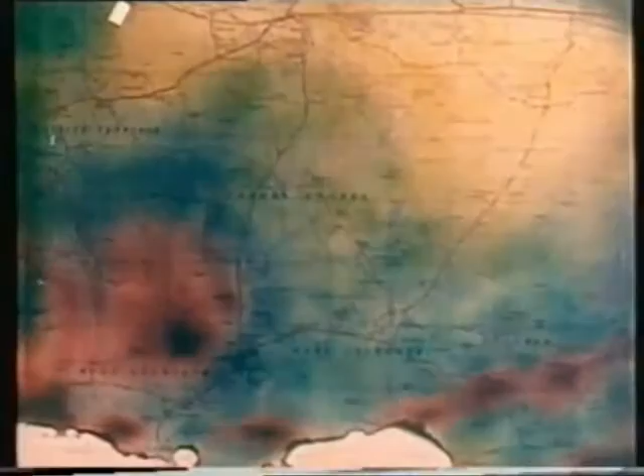At the Atomic Energy Authority's research establishment at Winfrith Heath, the various processes will produce active and non-active effluents. It was planned that the slightly radioactive effluent should be discharged 2 miles out to sea. This involved the laying of a pipeline 6 miles overland from the site to the coast, and then out 2 nautical miles.

The contours of the land through which the pipeline was to be laid varied considerably. At the 6 lowest points washouts had to be installed, while at the higher points, air valves were fitted. At the highest point in the line, 275 feet above sea level, were break pressure tanks.

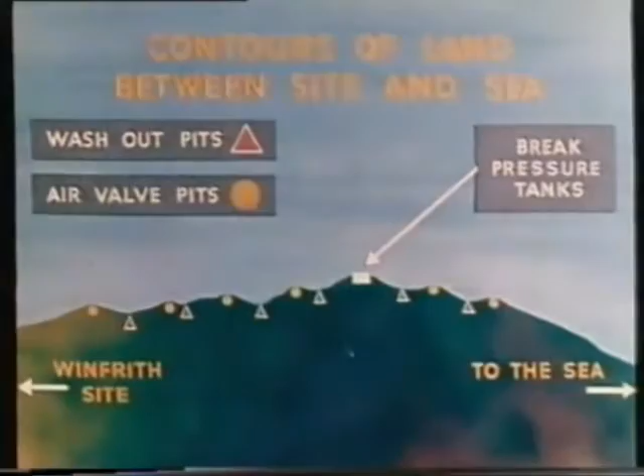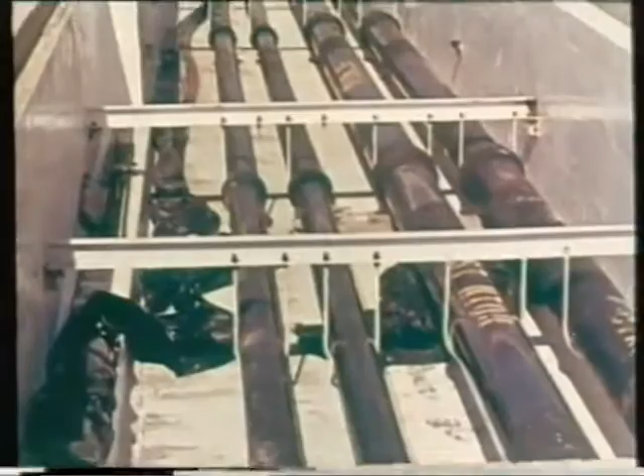At Winfrith, the active effluents will be pumped from the various buildings to delay tanks through pipes laid in ducts coated with chlorinated rubber paint to facilitate decontamination in case of active leakage. Effluent from the delay tanks will be sampled before being pumped to disposal tanks next to the master pump house. Non-active effluents will be pumped direct to the disposal tanks.

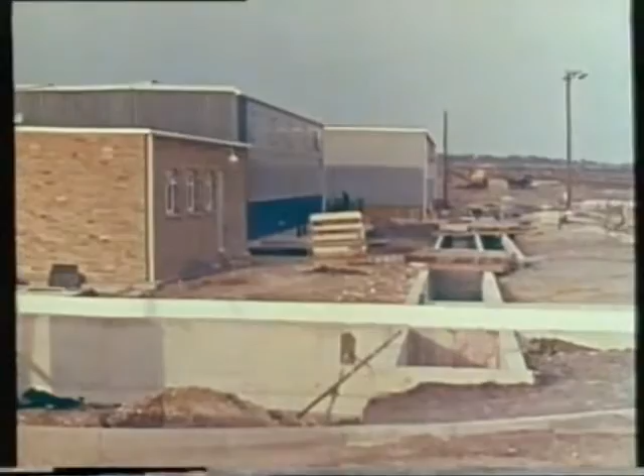From the master pump house, the overland pipeline was designed as a pipe resting within a pipe, the active effluent being discharged through the inner pipe and the non-active effluent through the surrounding space. The idea of a pipe within a pipe is a double precaution against any possibility of the leakage of radioactivity into the underlying strata of water-bearing chalk.

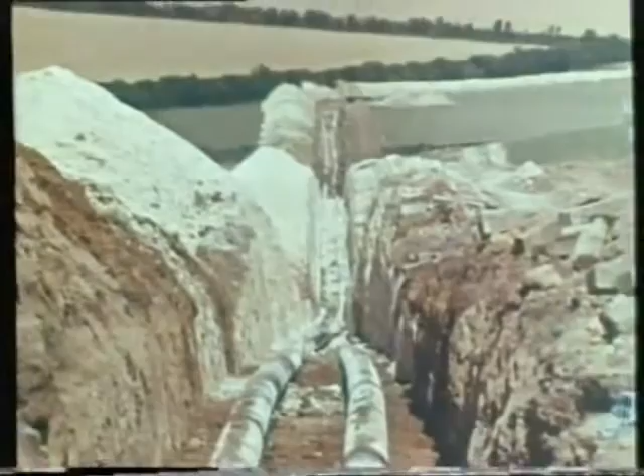The route of the pipeline was planned primarily to give ease of access to the washout and air valve pits at all times for maintenance. For instance, should washing out the pipes become necessary and there is any possibility of the liquid being active, it would be pumped direct into mobile tankers. Any spillage from the air valves or washouts will be contained in the pits and removed in the same manner. The route was also planned to avoid undue disturbance to agriculture and the surrounding farmland.

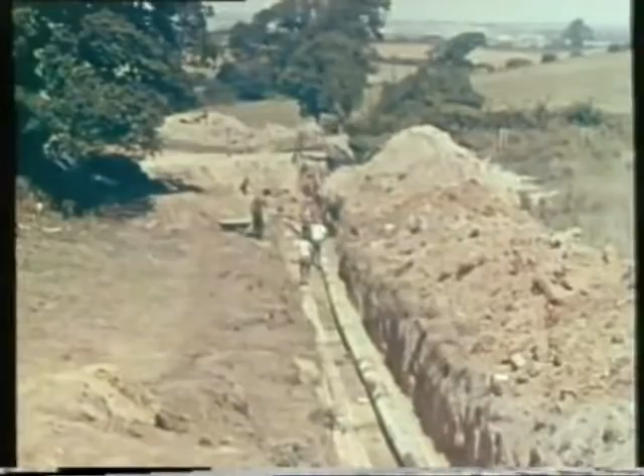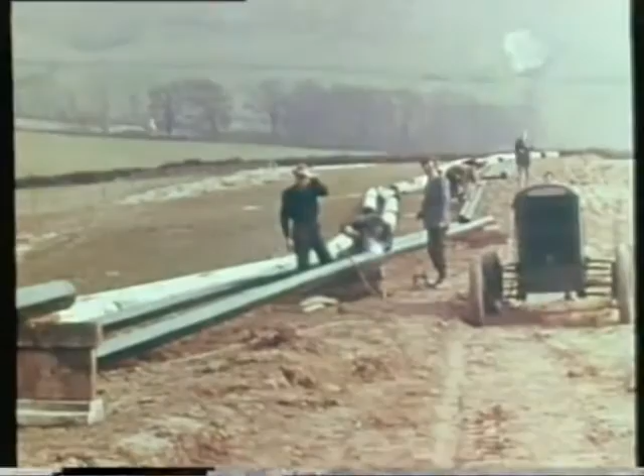The pipeline should be considered in 2 stages: overland to the coast at Arish Mell, then the next stage of 2 miles out to sea. It was no ordinary pipe-laying job, and a number of tricky engineering problems were involved. In many ways, the project was unique. The overland line consists generally of a 6-inch pipe inside a 12-inch pipe. The pipes are mild steel tube, 3/8 of an inch thick, coated with bitumen inside and out.

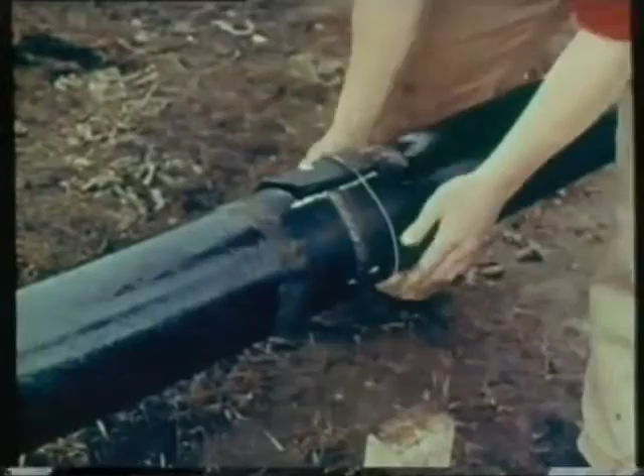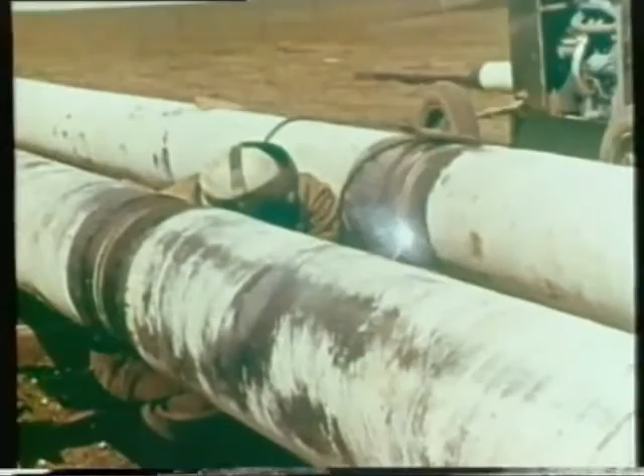3 40-foot lengths of inner tube were first butt welded together, and the welds radiographed by gamma rays. When found satisfactory, the scale was removed from the inner weld by a rotating flailing head, and the interior coating of bitumen made good at the weld. The same procedure of assembly was followed with the outer pipes. 3 lengths were welded together, and the external protection of bitumen asbestos sheathing, reinforced with woven glass fiber, was made good at the welded joint. This method of pipeline construction was carried out over the 6 miles of land line.

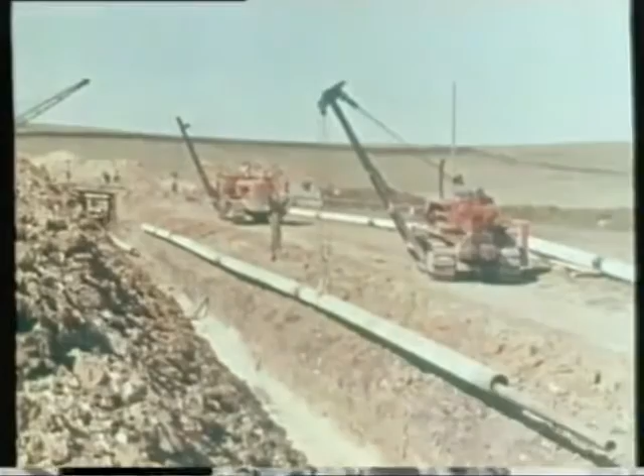To prevent damage to the internal coating of the outer pipe, a carriage was fitted to take the weight of the inner pipe as it was inserted. The length of pipe within a pipe was then lowered into the trench and offered up to the leading end of the pipeline already laid. The inner pipe was lined up, butt welded, the weld descaled and radiographed.

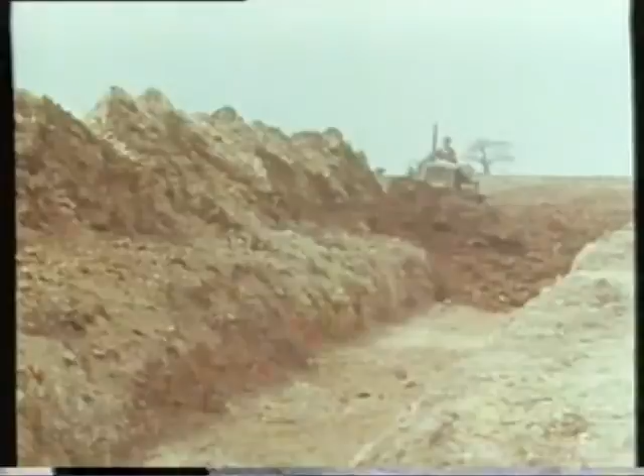When the radiograph showed that there were no defects in the weld, the same drill took place with the outer pipe. As a check on the standard of welding, about 5% of the welds on the outer pipe were also radiographed. The external shielding was tested and any defects repaired before backfilling. Wherever possible, as soon as the section was completed, the trench was filled in and the land restored. Some points, however, had to be left open for the construction of air valves and washout pits. The depth of trench was such as to provide a 3-foot minimum cover over the pipes.

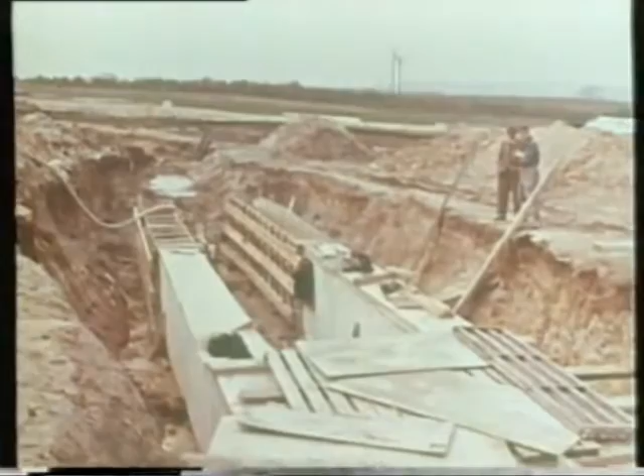Road crossings were necessary at 6 points, but only one of them was under a main road. Here the pipes ran through a concrete culvert protected by a reinforced concrete slab. The culvert has an access and inspection chamber at the end and is long enough to allow for the proposed widening of the road at a later date. Under minor roads and farm tracks, the pipelines are also protected by reinforced slabs of sufficient length to allow for future road widening.

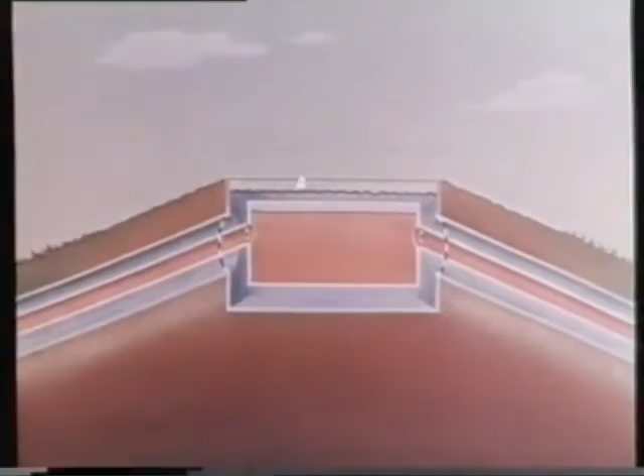At the highest point in the line are the break pressure tanks. Up to this point, the effluent is under pressure from the main pump house. From here onwards, the flow is by gravity. Each of the break pressure tanks consists of a steel tank into which the inner pipe is welded and surrounded by the concrete tank of the outer pipe. Thus, the principle of a pipe within a pipe is maintained.

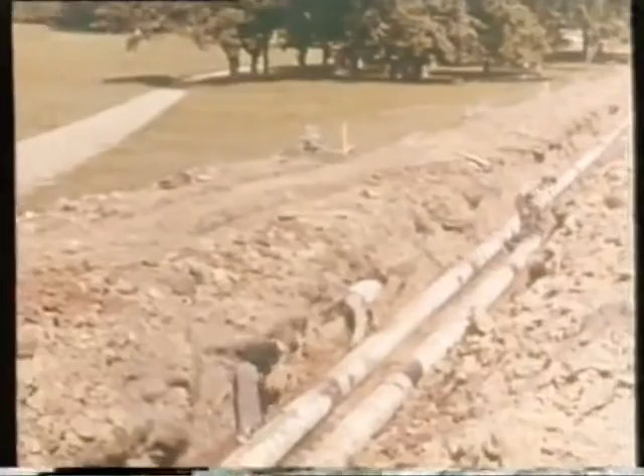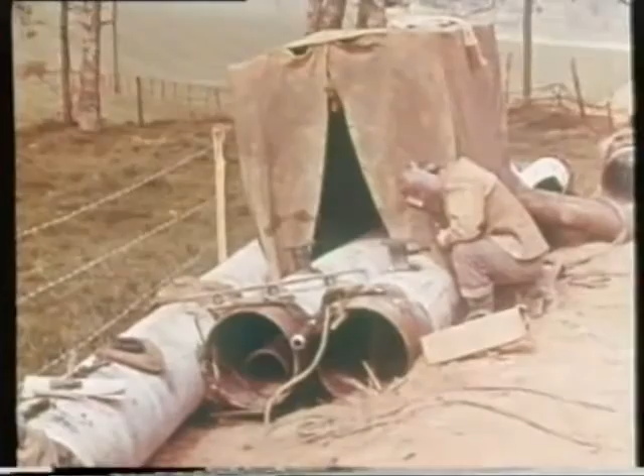About 1.5 miles from the coast, the pipeline runs through the grounds of Lulworth Castle, built in 1588, the year of the Armada. After leaving the castle grounds, the pipeline makes its final under-road crossing. Beyond this, excavations were being made for the last air valve pit of the line. As with the other air valves and washouts along the line, the branches were welded into the inner and outer pipes.

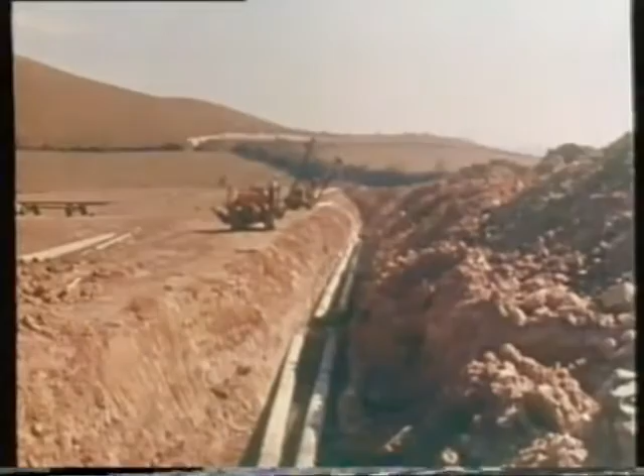From here, the line ran through the War Department's gunnery range, and the depth of trench was increased to provide a minimum of 8 feet of cover as protection against ricochets and the passage of tracked vehicles. On the flatter sections of the gravity side, larger diameter tubes had to be used, but from this point, the rest of the overland run sloped steeply downhill, so the diameters were reduced back to 6 and 12 inches respectively.

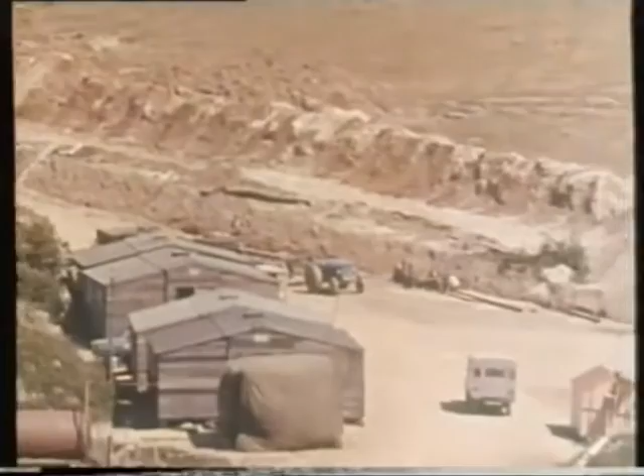For 200 yards through the ranges, the pipes were encased in 2 feet of concrete with 10 feet of earth cover, as this section was in a direct line of fire. Alongside are the cable ducts for the supply of electricity to the shore valve house and for the cathodic protection system of the sea line and the shore end of the land line. And so, the 6-mile overland pipeline continued towards the shore at Arish Mell.

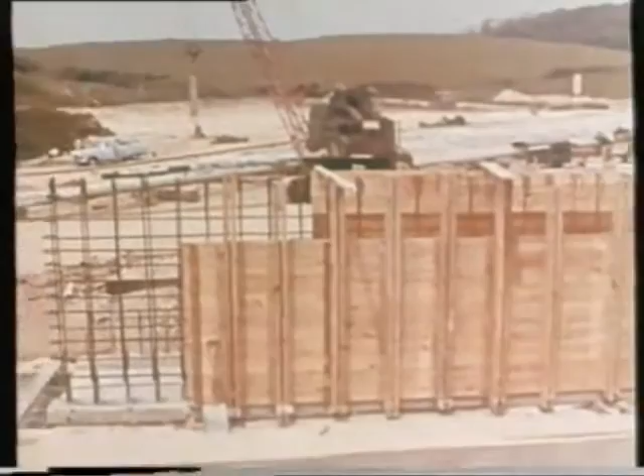Just above the high water mark, the shore valve house was being constructed. In this reinforced concrete chamber, the twin pipe-within-a-pipe landline was to be divided into 4 separate 6-inch pipes. 2 of these, carrying the non-active effluent, were to end 50 feet beyond low water mark. The other 2, carrying the active effluent, were to be connected to the sea pipeline.

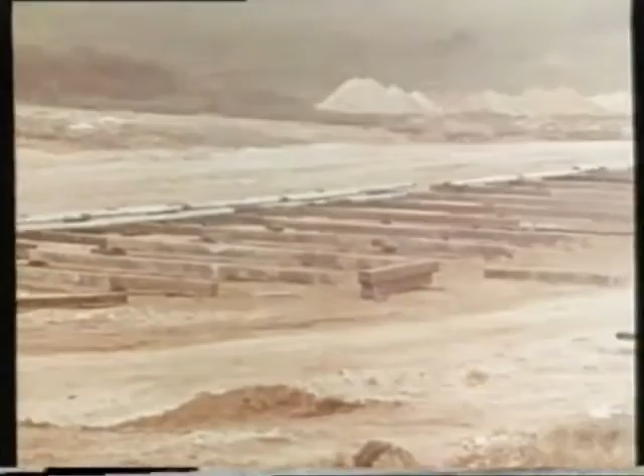This was to be a twin line, 2 miles in length, and provision had to be made for an assembly and launching area. This meant the clearing and leveling of several acres of land running back from the shore. For the sea line, lengths of pipe 6 inches in diameter and ½ an inch thick were assembled on the storage racks, and then welded into 1,200-foot strings.

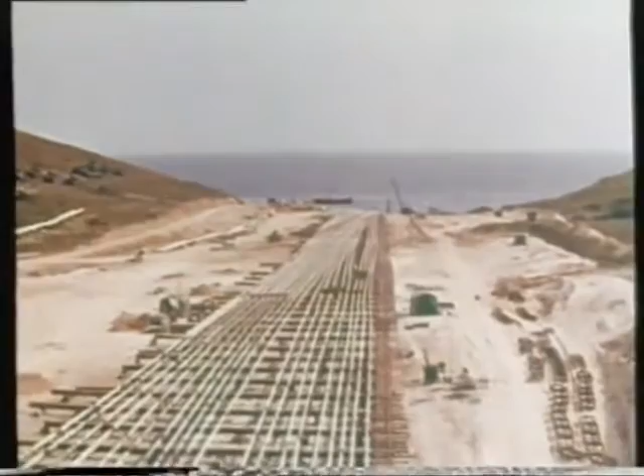Every weld was radiographed, descaled and bitumen coated, as in the case of the landline. The completed strings of pipe were checked for internal obstructions and air pressure tested to 100 pounds per square inch. The external bitumen asbestos coating was of course continued across the joints.

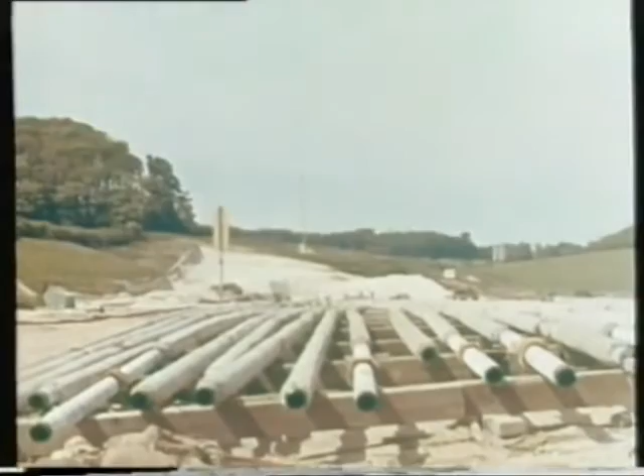Before launching, the pipes were covered with a casing of concrete 1.5 inches thick as a protection during and after pulling and as an anchor for the line. The pipe was surrounded by wire reinforcement held away from the tube by small spacing blocks. Metal shuttering was then placed around the tube and the concrete poured. Vibrators applied to the shuttering ensured that the concrete was well compacted.

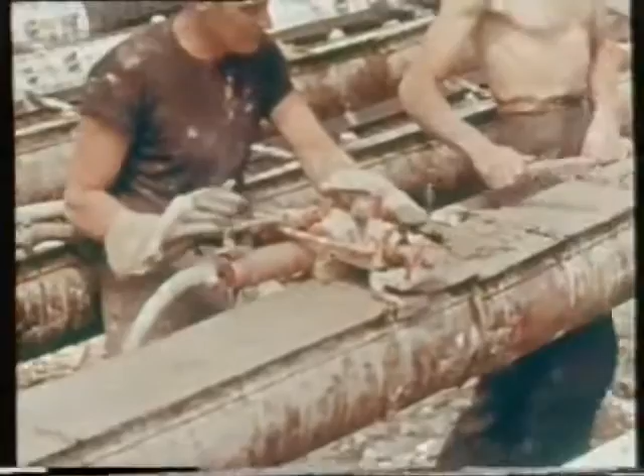The thickness of concrete round the 600 foot of pipeline at the shore end was increased to 3 inches as an added protection and anchorage against wave action where the water is shallowest. The laying of the sea pipeline from Arish Mell to a point 2 miles out to sea involved a great deal of underwater work.

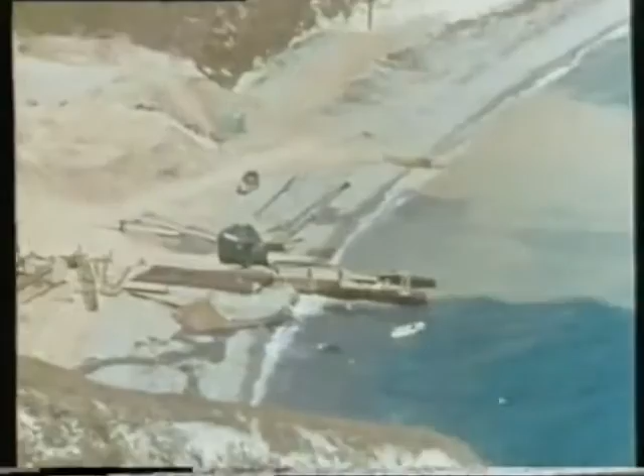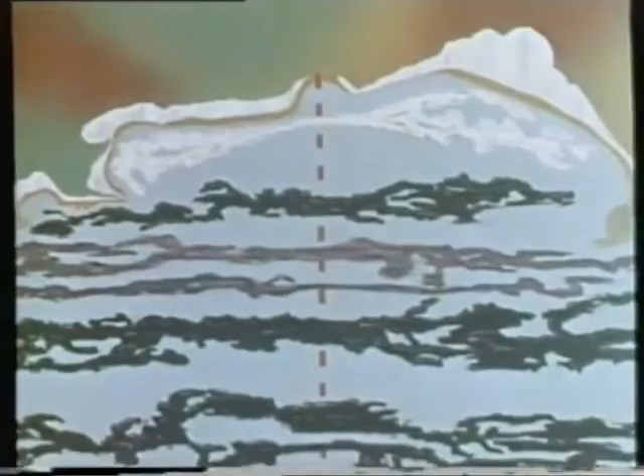A survey of the seabed had shown that there were 7 main reefs running across the proposed line of the pipe. The inshore reef was a chalk barrier, 225 feet in extent. The next one, Kimmeridge clay, 400 feet. Then came 2 of Portland stone, 350 feet. The 3 outer reefs were of black shale, 1,125 feet together. In addition, the survey also determined the distance from the shore of each reef and the depth of water above it.

The chalk reef was 600 feet from the shore in 23 feet of water. The next reef was 2,125 feet out and 50 feet below the surface. The 2 Portland reefs were respectively 3,100 and 3,850 feet offshore in 54 and 60 feet of water.

The 5th was 4,500 feet from the shore, 69 feet below the surface. The 6th was 6,175 feet out at a depth of 74 feet. And the last reef was 7,350 feet from the shore in 82 feet of water. Through these reefs, a channel had to be blasted.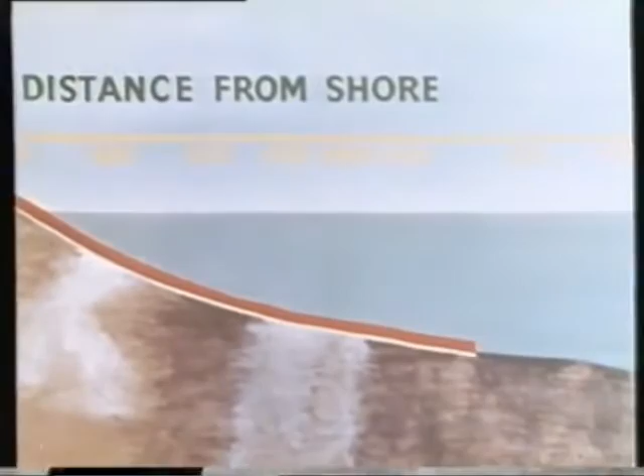Over 3,500 cubic yards of rock had to be removed to create a smooth channel so that the pipeline, when laid, would not flex to a sharper radius than 1,500 feet. When the whole of the line had been laid, a prefabricated diffuser assembly was to be lowered and fitted to the end.

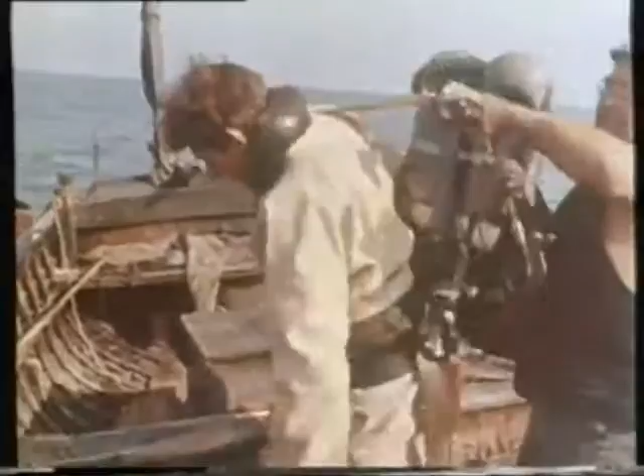This then was the problem. The project itself entailed 6 months of underwater work, with all its attendant hazards. This stage of the project was unique. It was to be a line and level job. One of the authority's site engineers, specially trained as a diver, made a detailed survey of the reefs through which the channel would run.

Sea lines have been pulled out before, but this one is unique, not only because it is believed to be the longest sea outfall in the country, but because of the number of rock reefs through which it had to be pulled.

These reefs necessitated the preparation of a trench to an accuracy of profile and relative smoothness not previously attempted on such a scale underwater, and called for rigorous and detailed inspections at all stages of the work, in the same manner as for the foundations of a building on land.

Checking the general trench profile and detecting local projections and hollows was facilitated by the use of a specially developed pressure gauge, capable of measuring depths to an accuracy of plus or minus 3 inches.

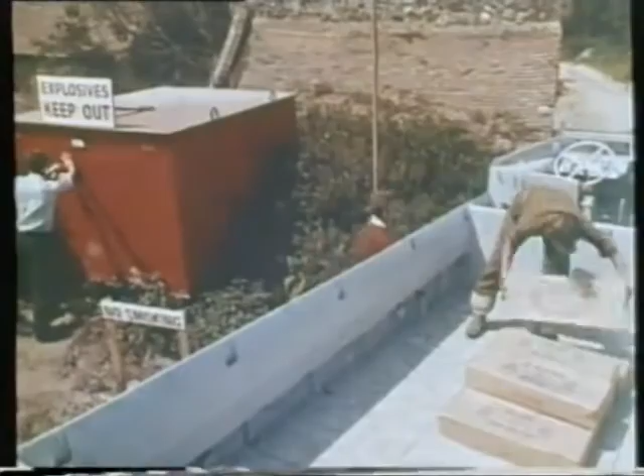A special submarine explosive was used for the blasting charges, kept in a store on land. The authority had the services of an army DUKW. This was most useful, not only to transport the charges for blasting, but to maintain a shuttle service between the ships and shore for stores and personnel.

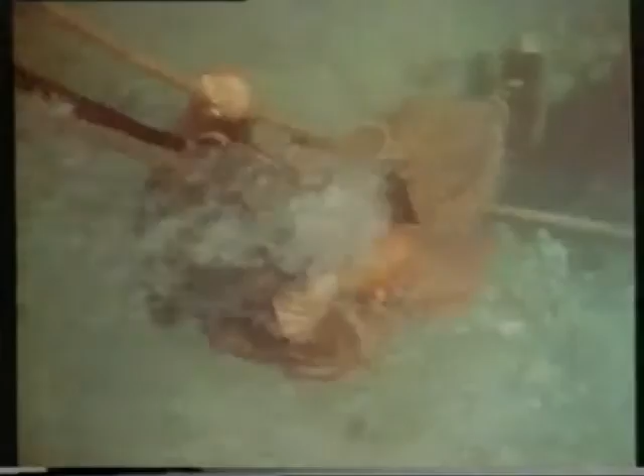Each ship carried at least 2 standard divers. As soon as the vessels were in their allotted positions, the divers went down to start the day's work. The charges, already primed, were then dropped down a shot line to the diver waiting below. Released from the shot line, these were carried by the diver and placed on top of the reef to be blown.

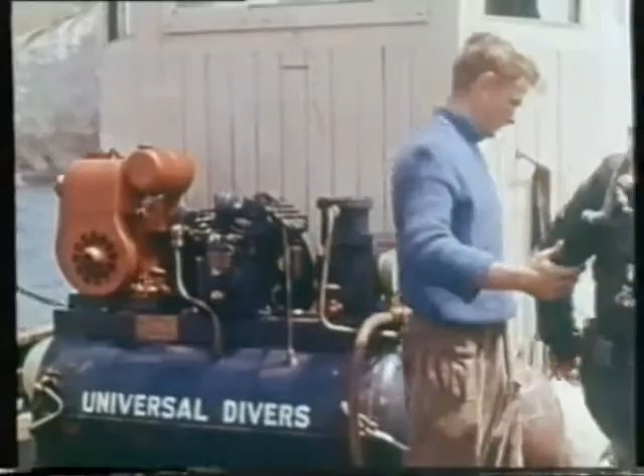While the charges were being laid, a skin diver was getting ready to take down the fuse. Skin divers were employed to service the standard divers. Their greater mobility saved much time and helped to speed up operations. When the charges had been laid, the fuse was taken down to the standard diver for connecting up.

The area was then cleared of divers and the charges detonated. Around the area of each charge, an air cushion was created to reduce the effect of the blast on marine life in the neighborhood. After each blow or series of blows, the authority's engineer inspected and checked the results.

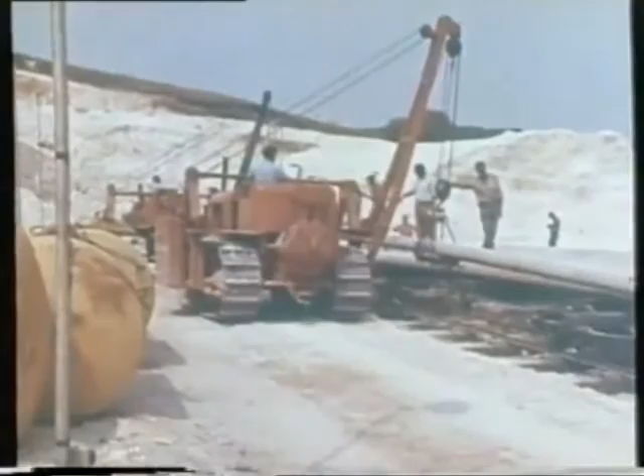As the preparation of the channel neared completion, work started on getting the sea pipeline ready for pulling out. Side boom tractors lifted the first length of pipe from the storage racks to rail bogies running parallel with the racks. Travelling bogies were used to avoid damage to the concrete covering of the pipes.

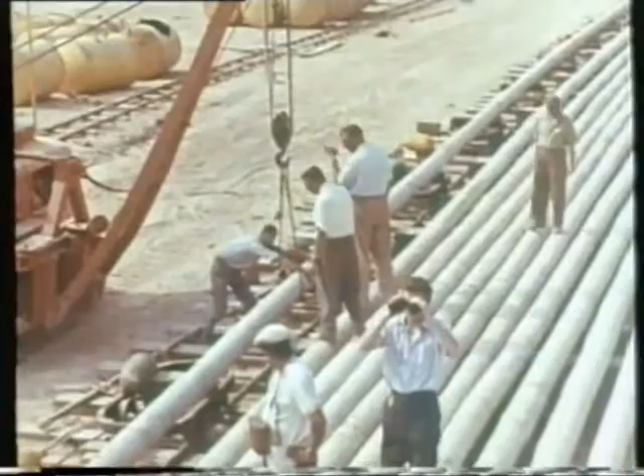Each pull was to be a string of twin pipes 1,200 feet long, held apart at 22-inch centers by shaped wooden blocks and strapped. Buoyancy tanks were fitted at 60-foot intervals to reduce friction between the pipe and the seabed, so that the line would ride lightly during the pulling out operations.

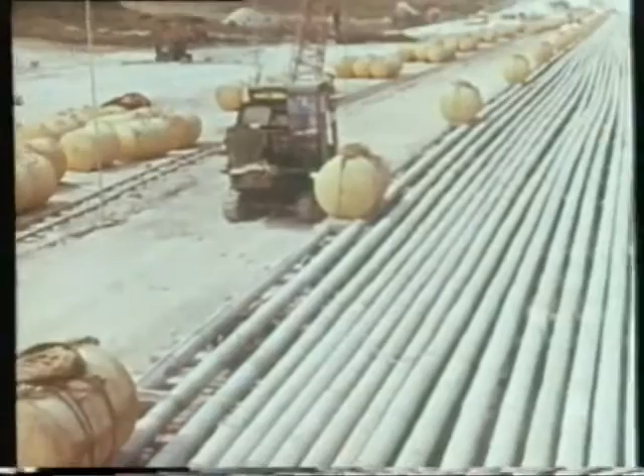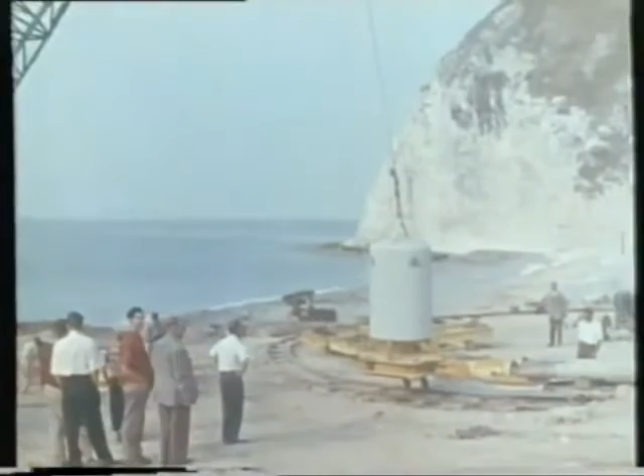At the pulling end of the line, flanged joints at the ends of the pipes were bolted to the pulling head assembly. On this was fixed the leading buoyancy tank and the pulley for the hauling cable. With a crane lifting the forward end, the pipeline string was moved down to locate it on the rubber-tired guiding bogies leading to the sea. The string was steadied by side boom tractors as the end was lifted by the crane.

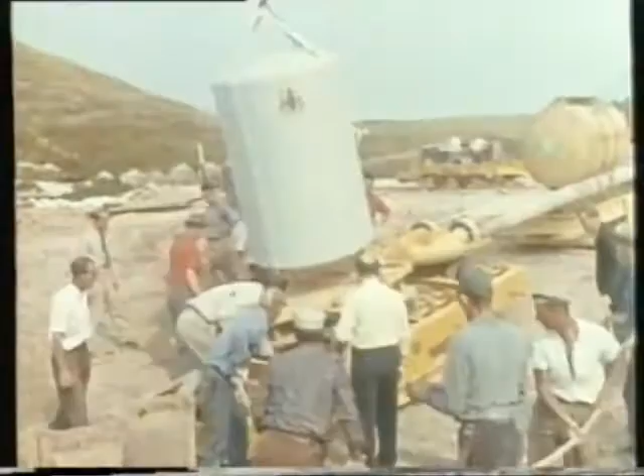Out at sea was the Colbar, a specially adapted barge, fitted with the main hauling winch for pulling out the pipeline. Four specially designed anchors, individually controlled, enabled her to maintain her exact position in the direct line of pull, irrespective of movement of the tides and currents. The hauling cable from the Colbar was now threaded through the pulley on the lead assembly and took the pull.

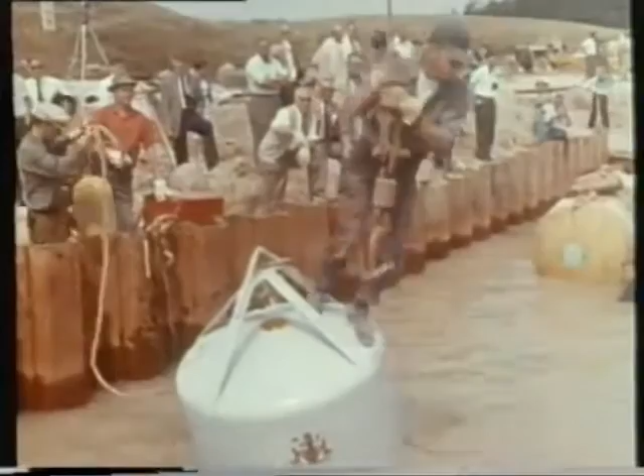Between high and low water marks, a deep trench had been dug and protected by steel piling for the launching operations. With the pipe string in position, frogmen made the final checks. The crane was unhooked from the float, and the first pull started forward into the water. Each buoyancy tank carried a release gear and marker buoy.

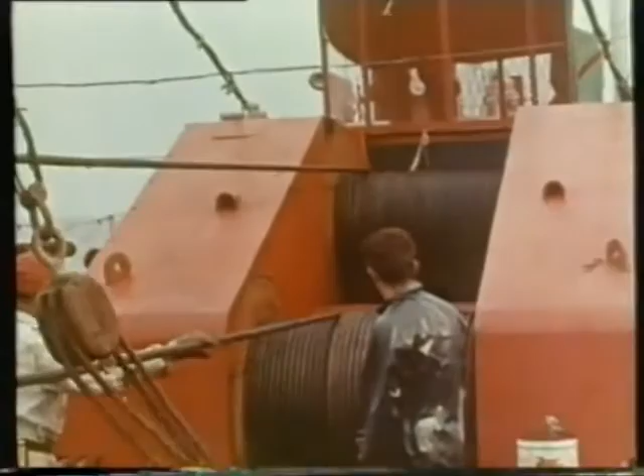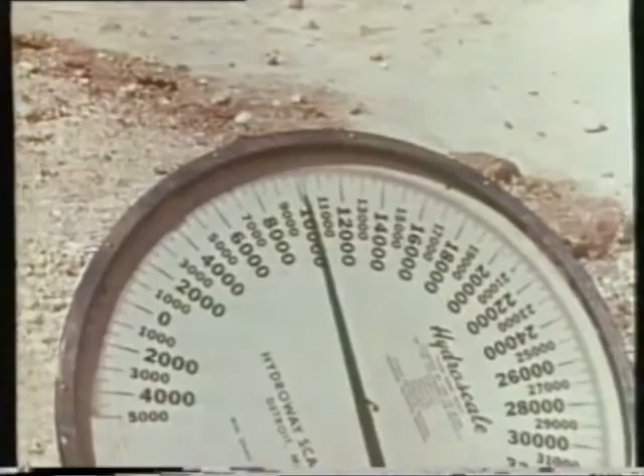As Colbar hauled, the movement of the pipe was controlled by a hold-back winch at the far end of the storage racks. The cable from this winch ran to clamping gear fixed to the end of the pipe. A strain gauge on the winch gave readings of the hold-back tension, which were relayed by radio to the control tower.

At the same time, on Colbar, a similar gauge indicated the pulling strain, which was also radioed back to the shore, so that the pull and hold-back tensions could be balanced by instructions from the control tower. As the pipe moved on to the rubber-tired bogies, so its weight was removed from the rail bogies, which ran clear, ready for use on the next pull.

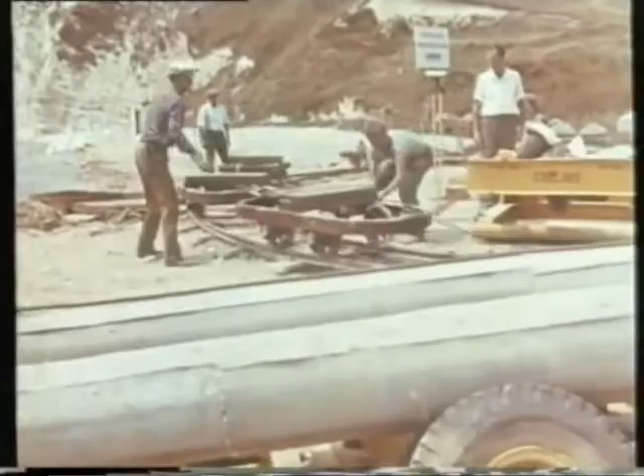Underwater inspection, as the pipeline was pulled out along the channel, showed that all was well. The size of the first tank had been designed to give the head of the line a slight lift to hold the leading lengths clear of the seabed and thus facilitate the pull. In its final position, 2 miles out, the towing head will be removed and the diffusers bolted to the flanged ends.

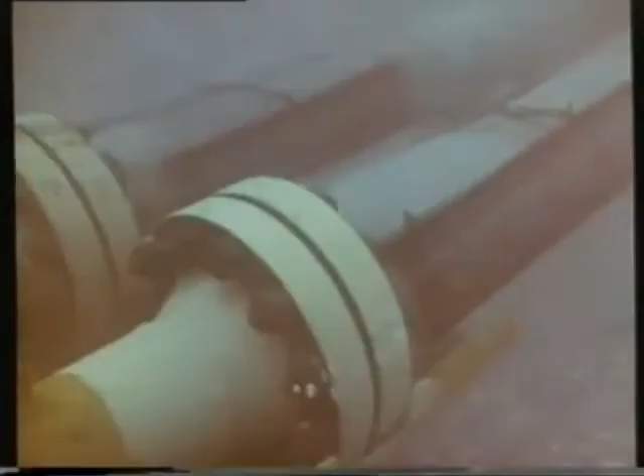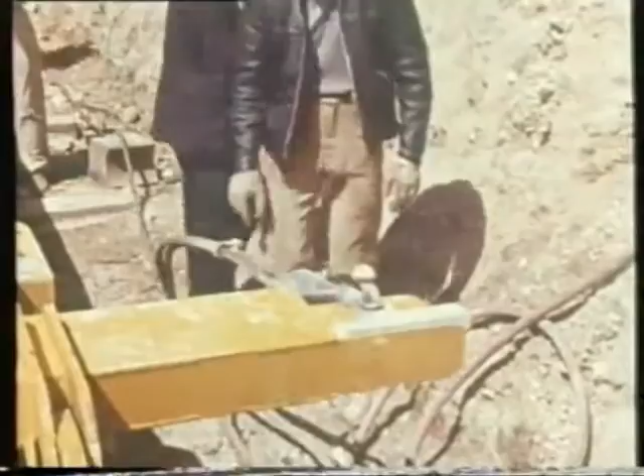As the end of the pull neared the shore, provision had to be made to secure the end of the pipeline. Two cables held by dead men were fixed to clamps on the pipe so that the hold-back cable could be released for fixing to the end of the next pipe string. A strain gauge fitted to the dead men registered the tension in the restraining cables.

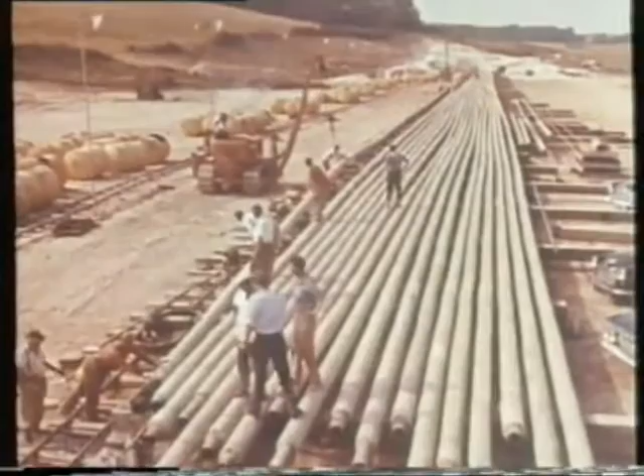The next 1,200-foot string of twin pipe was assembled and strapped, and then brought up to the end of the first pull, till one pipe butted on the other. These were clamped together and butt welded.

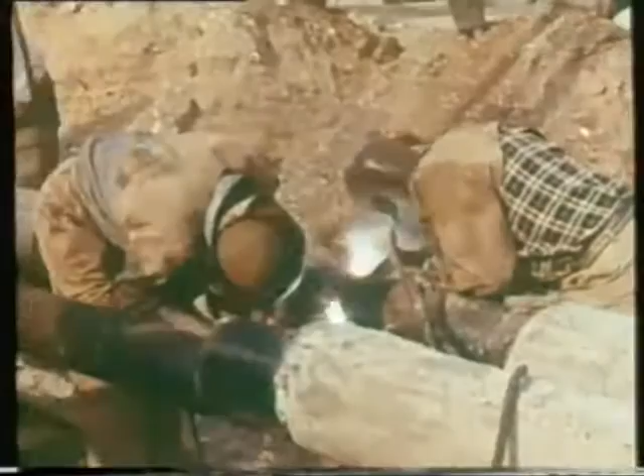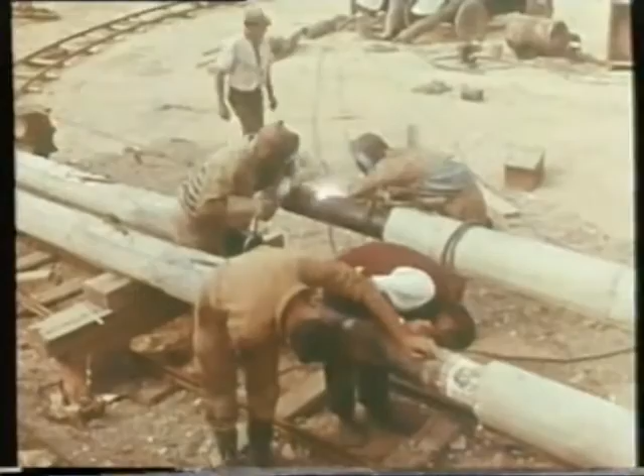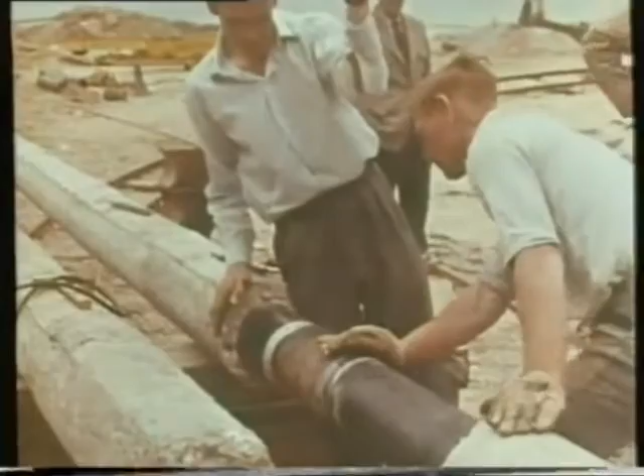Rather than try and locate both pipes exactly, it was decided to cut back the second pipe to make a standard 11-inch gap, which would be filled by a prepared length of pipe with a wall thickness of 11/16. As it was impracticable to descale the closing weld or to coat it internally with bitumen, the thicker walled pipe offset the lack of anti-corrosion protection normally provided by descaling and bitumen coating.

The welds between each 1,200-foot string were radiographed. The radiographs were immediately developed and examined on site. When the weld had been approved, it was bitumen coated and wrapped with fiberglass, and a further coating of bitumen applied.

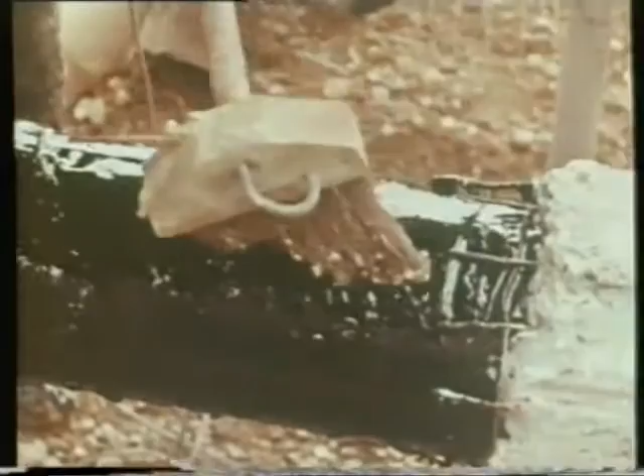Throughout the length of each string, a high voltage detector was used to check the continuity of the bitumen coating for the presence of pinholes. The joints were made good with quick-setting concrete, covered with sacking, and a further coating of bitumen applied to protect the exposed surface of the freshly poured concrete.

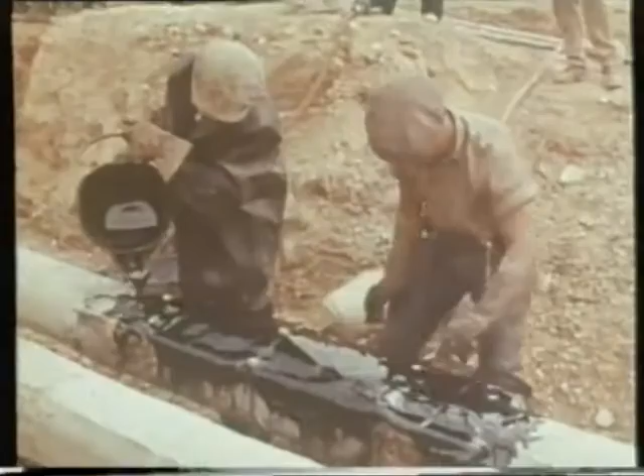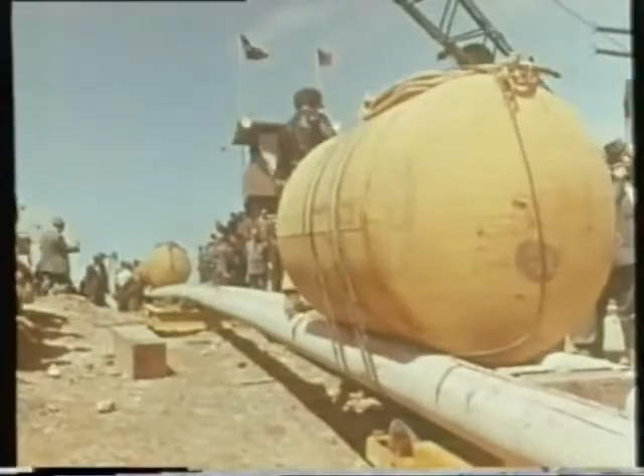While all this was going on, the next set of pipes was being moved into position. Even with their coating of concrete, they flexed without damage. Ten separate pulls were necessary to take the pipeline out to the full distance. Each pull took about an hour and a quarter, but the operations between pulls of assembling the strings, welding and concreting the closing joints took an average of 6 to 8 hours apiece.

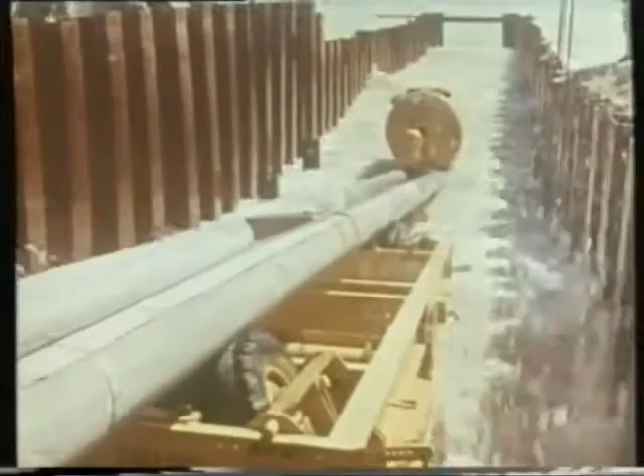One point on which early checks were advisable was to see that the concrete casing was doing its job of protecting the bitumen-sheathed pipes during the pulls. Day and night, the work went on.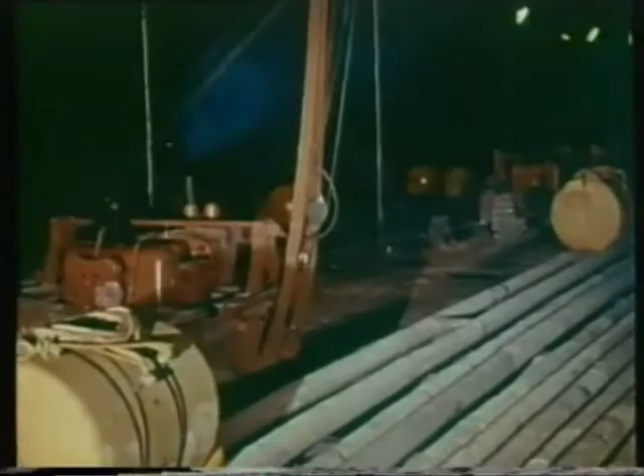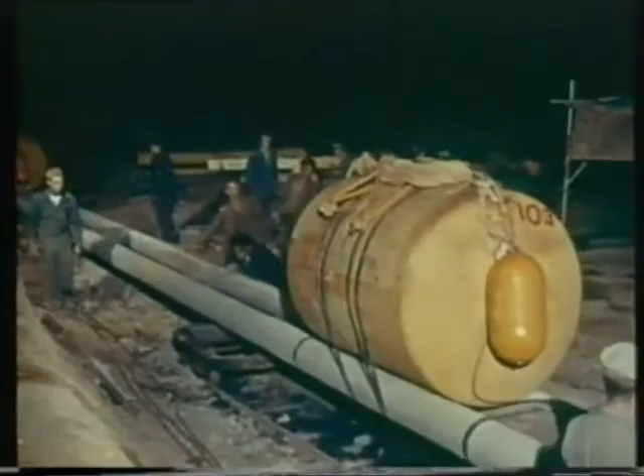Even after making all allowances for the known tide and weather conditions for the time of year, there was always the possibility of a sudden storm blowing up. In fact, on the second night, pulling continued during a force 7 gale. In spite of this, the whole 2-mile pipeline was successfully pulled out in 5 days, 2 days less than had been expected.

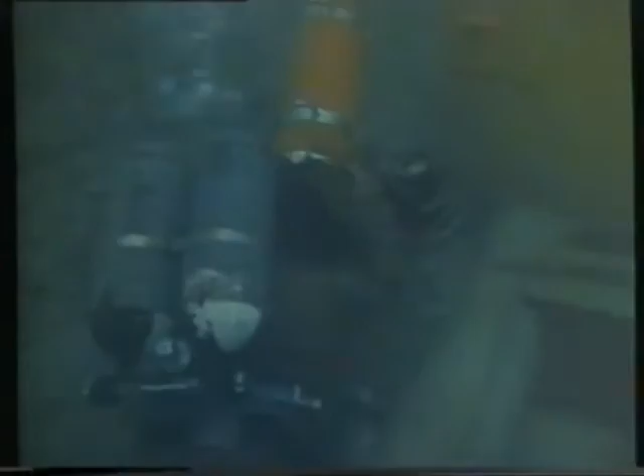To speed up inspection and avoid waste of energy, an underwater scooter was used by the authorities' engineer to make a detailed survey, yard by yard, along the whole length of the pipeline, before clearance was given for the release of the buoyancy tanks. The channel, blasted through the rock reefs and outcrops, was such that the undulating profile of the pipeline would not be flexed to a sharper radius than 1,500 feet.

Any remaining hollows were to be packed with small stones or concrete-filled bags to provide a firm and continuous support for the line. The exact position of every one of these hollows was logged on the spot.

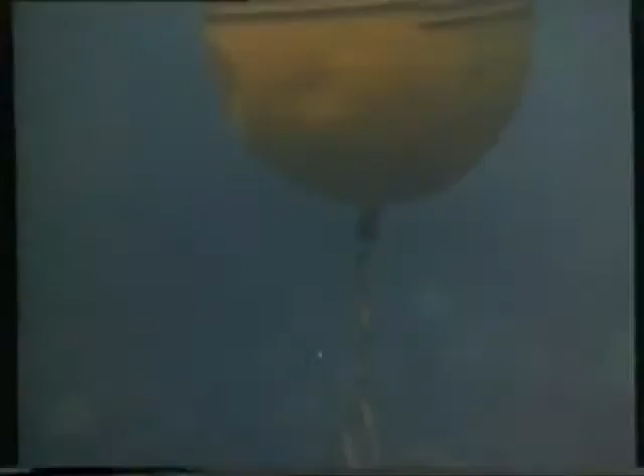A marker buoy was attached to a length of rope on each of the buoyancy tanks. The other end of the rope was connected to a cutter, which would shear through the strapping around the tank when the rope was pulled.

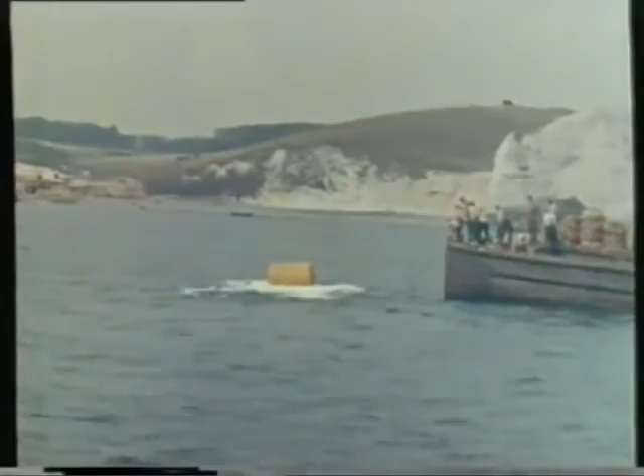By pulling on a continuous cable running the length of the pipeline, the marker buoys were released in succession. As each one surfaced, so the rope attached to it was passed to the winch on the barge. With a haul on the rope, the strapping was sheared and the buoyancy tanks released. The tanks were towed ashore in groups and landed by crane.

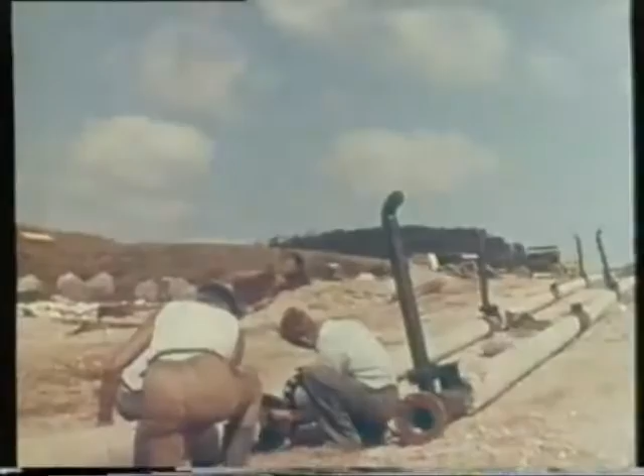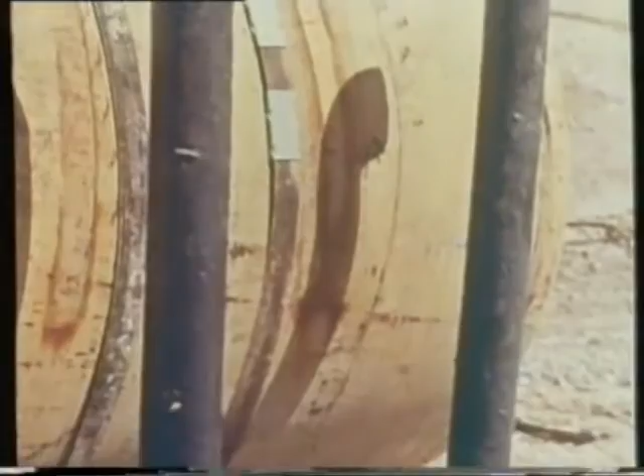Meanwhile, the diffusers for the end of the pipeline were being assembled. There are four 3-inch diameter, 3-foot high vertical outlets on each pipe. This was calculated to assist the dispersion of effluent in the sea. The assembly was to be bolted to the flanged ends of the line in 80 foot of water and chained to 2 concrete anchor blocks. The complete assembly, suitably buoyed, was towed out for the final stage of this unique pipe-laying job.

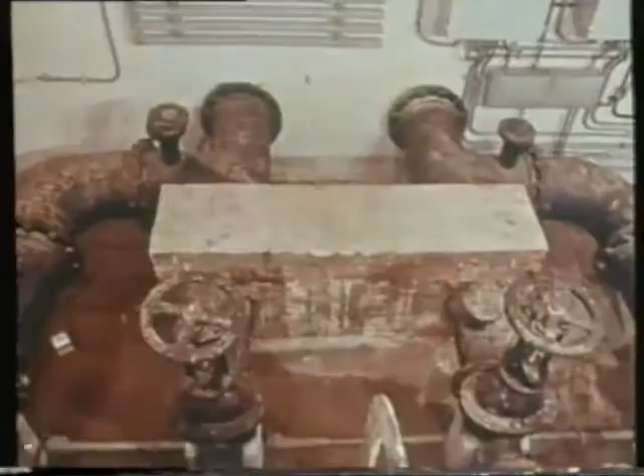At the same time, back on shore, the welders were busy connecting the land pipeline to the 4 sea pipes against the background of the shore valve house, now covered with earth as protection against the possibility of a chance hit from the ranges. Inside the valve house, the twin landline pipes were divided. The 12-inch outer pipes, carrying the non-active effluent, branched through reducers to two 6-inch pipes ending 50 feet beyond low water. The 2 inner pipes carrying the active effluent continued to the diffusers 2 miles out.

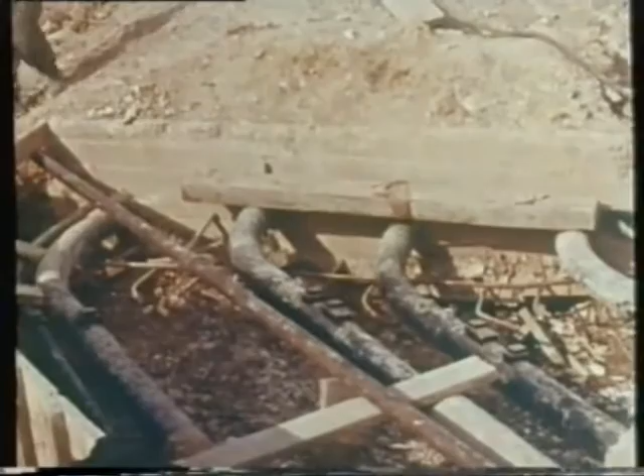From the shore valve house, the 4 separate 6-inch pipes were laid across the shingle and through the trench which had been used for launching. They were covered with concrete and filled in, after which the sheet piling to the trench was to be cut off below normal beach level, restoring the beach to its original appearance. Although from the break pressure tanks at the highest point in the land line, effluent flows by gravity, the pipelines are kept running full by controls in the shore valve house, in which there are also flow meters, monitoring and sampling equipment.

Soon there will be few signs of all the recent activity. Effluent will be safely discharged to sea, and the intervening countryside will look very much the same as it did before the new research establishment came to Winfrith Heath.